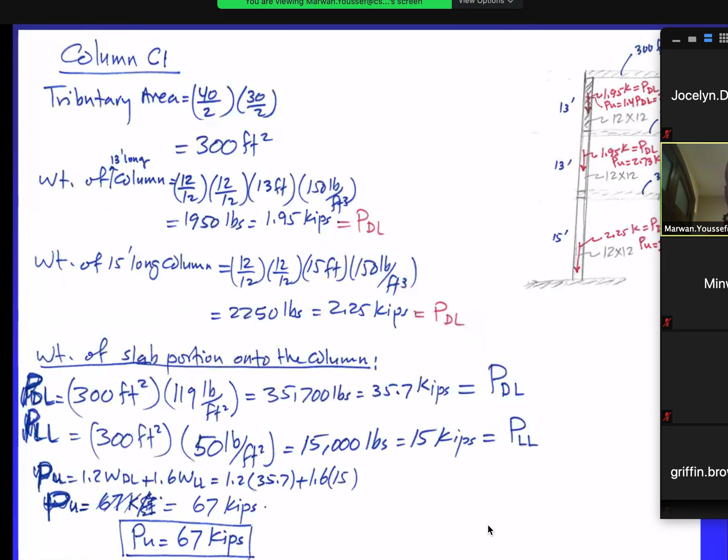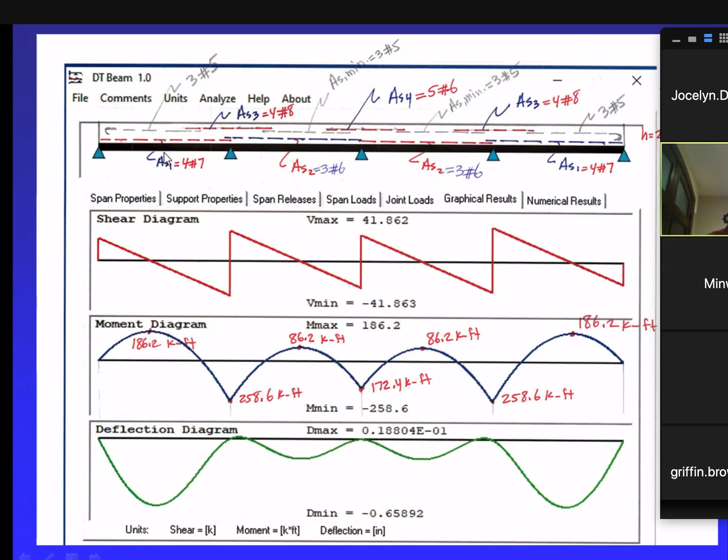Just to remind you, we took the DT beam results, and I went through how we designed the rebars based on the moment diagram. And then we showed how you show the steel and all that stuff, and then we went over this table.

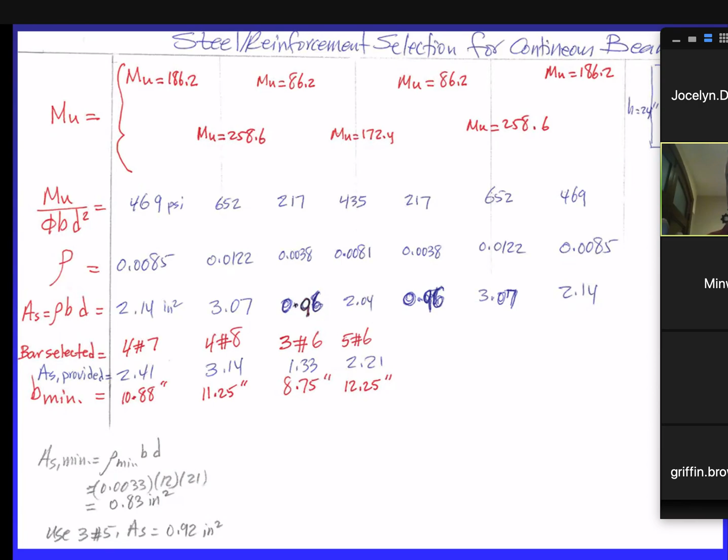So today I want to do the same, but for the slab design. By the end of the day, you will be able to go to your project and design your slab and put it aside, and you're done. So you will see the time we're going to spend today, that's the design for all the slabs on the whole building, just to kind of see the magnitude of that, and you'll see how simple it is.

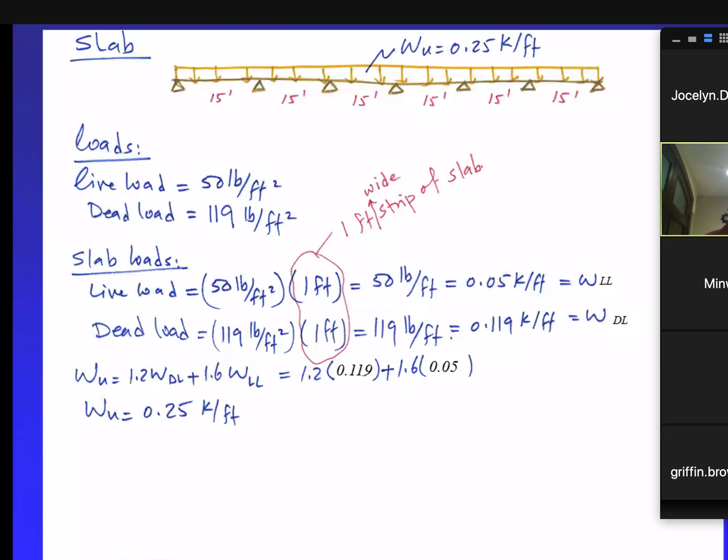Speaking of the slab, last time we talked about, just as a reminder, this was our slab. Remember? And just let me go one step further back.

When we started with our building, we said in order to make this one-way slab, we inserted this floor beam. We inserted one beam here, we called it floor beam or beam 2. We inserted another floor beam and another floor beam. So looking at the cross section, my spans for the slab is now 15, 15, 15, 15, and so forth, because I started with a 30 here and I broke it in half. So this is my slab then, 1, 2, 3, 4, 5, 6 spans.

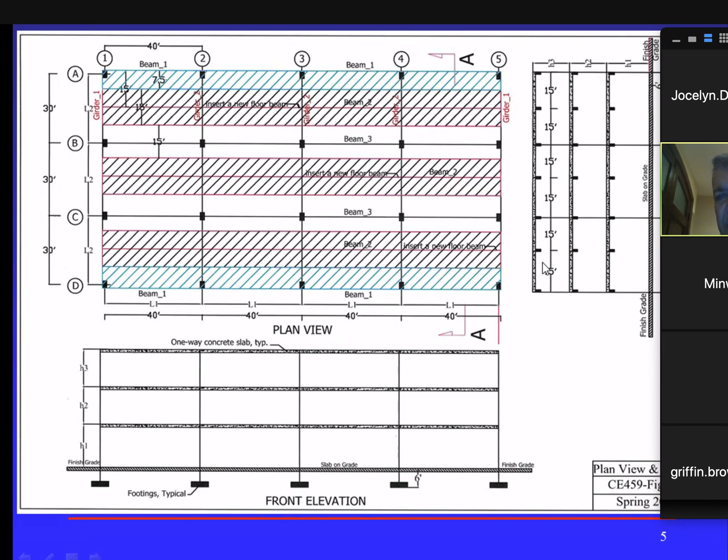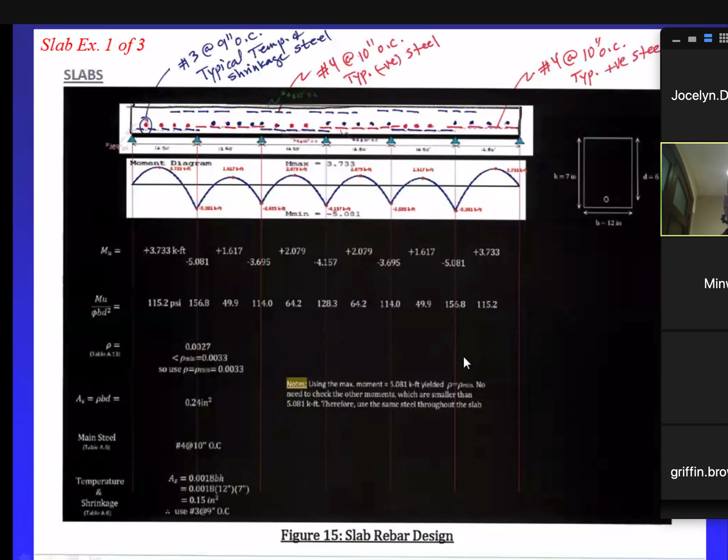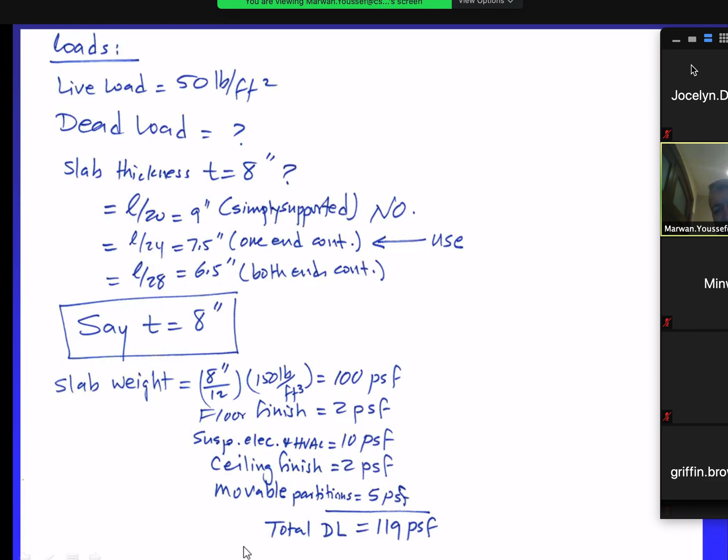Remember that? So we took that, and we of course determined the thickness of it from here, and then we went ahead and calculated the loads on it. That's not the right one, but it's the same one anyway, I'll show you. We calculated the loads. We ended up with T equal 8, the thickness from the table, and then we ended up with the total dead load of 119. Okay, so we did all that.

We talked about it many times, and then this was our slab where live load is 50, the dead load 119, and we calculated the load, so we ended up with W 0.25. So now we're gonna take this and put it in DT beam.

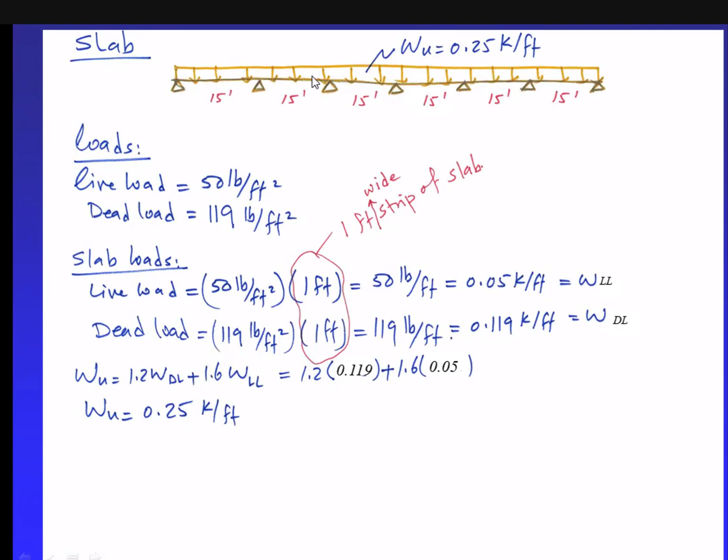Okay, so I'm gonna show you the one already made, so we don't have to waste the time. So you'll notice we have 1, 2, 3, 4, 5, 6 spans, and the load is 0.25. So you have to go to DT beam like this. Instead of 4 spans, you're gonna push insert a new span 5, insert a new span 6. The length of that is gonna be 15 in my example. Okay, so what about the area and the inertia?

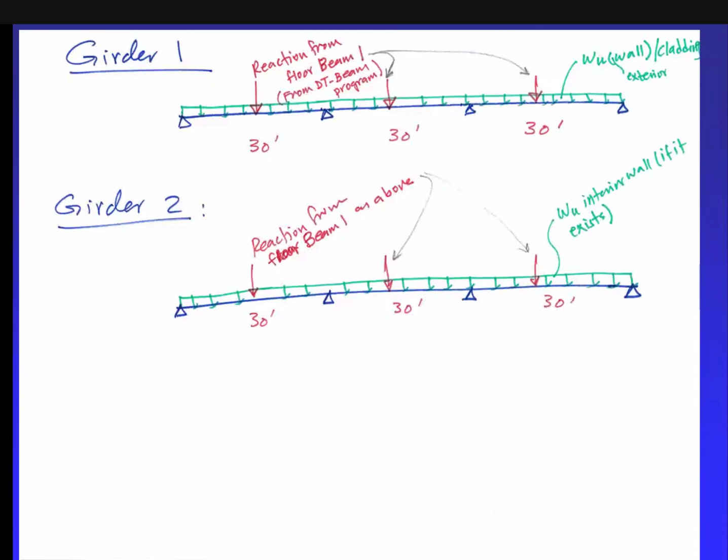Okay, so let's go, that's what we're gonna talk about next. So if I take the example I'm gonna use today, which is this one here, already solved, and I posted this on Beachboard, so you should have that.

So from the table, I determined that the total thickness is going to be 7 inches for this example. Okay, 7 inches thickness for this example. And remember how we take 1 foot strip of the slab, 12 inches, so B equal 12 inches. Okay, and then I'm going to put the bars at the bottom. So D is going to be roughly 7 minus 1 inch equals 6 inches. And then the way we do it here, D equal H minus 1, 7 minus 1 equals 6. And remember, the one is, we said that the clearance from the edge of the bar to the bottom is 3/4 of an inch, plus the radius of number 4, it's about 1 inch.

So 7 minus 1 is 6 inches. All right, so we went through that when we did the example for the slab. So this is the section I need. So if this is my section, what is the area? Area is 7 times 12, divided of course by 144 to give you the area in feet square. That's what you're gonna enter in the DT beam. How about the moment of inertia I? B H cubed over 12.

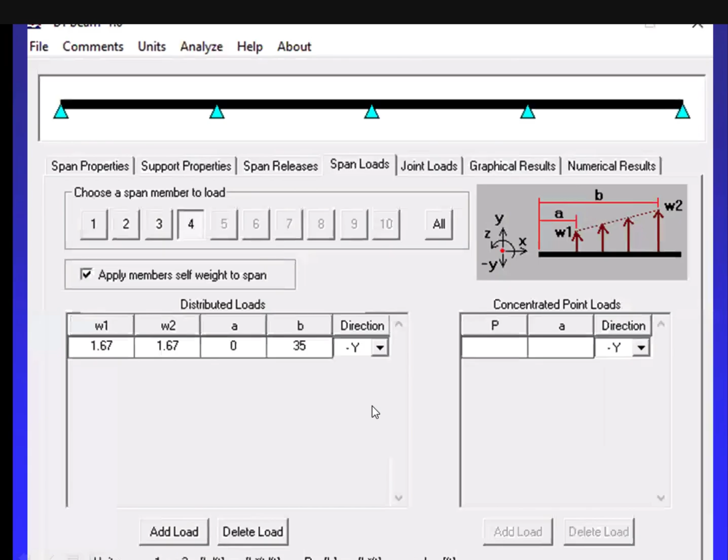Just as a quick review for you, once you get the moment diagram, it's gonna be very similar to what we did with the beams. There's a few things different in the slab, and that's why I wanted to do that today. So let's start with that.

Very similar to the beams, but notice the moments here are much smaller than the beam, right? Much smaller than the beams. Because the spans are small, and then the load is small, and then the thickness is small.

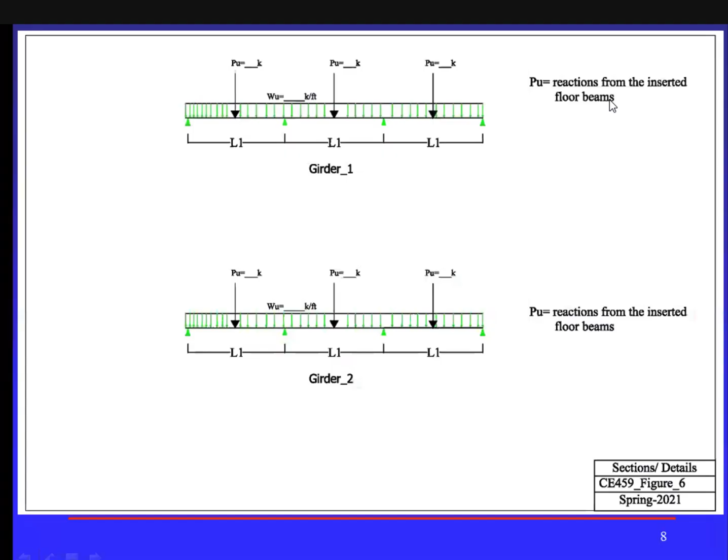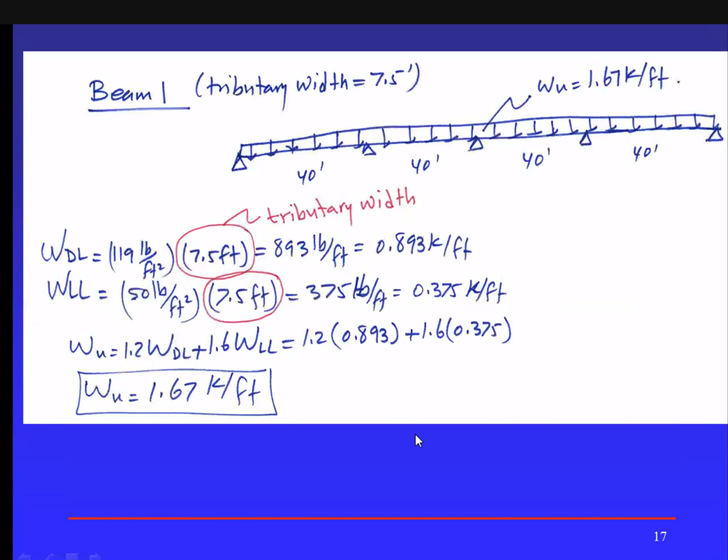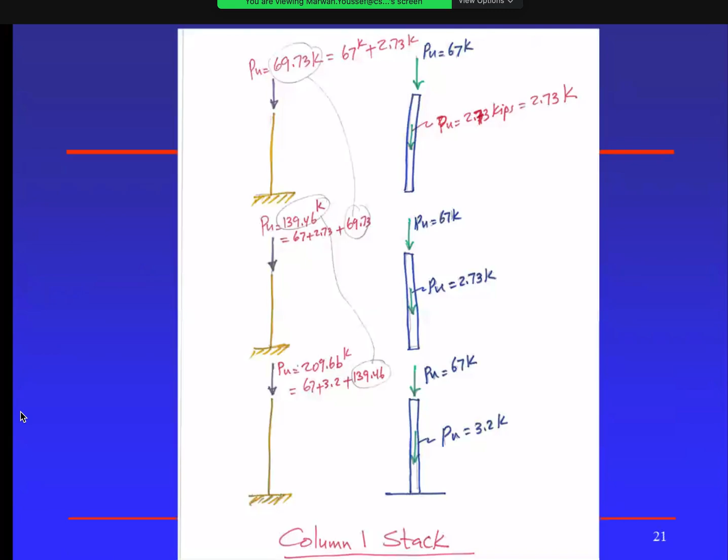Just to remind everybody, the question is, when I did my slab here, I ended up with, where is that? Let's see, right here. When I did my example, I ended up with T equal 8 inches, but that's not what I'm solving, I'm solving a different slab, sorry about that. So the example I'm doing here is a different example, which I took from a previous group from previous semesters just to show you. Look how nice a job they did, really, so you need to do good jobs like that. I added these by hand, of course, they didn't do that, I just used their sketch. So this is 7 inches because it's a different example, and even their slabs are not 15, I think this is 12.6 or 12.5, the span, sorry.

So we got that, mu over phi bd squared, we said we're going to multiply by 12,000. Once we get mu over phi bd squared for the maximum moment, it comes out to 156.8.

Once I have that, what are we going to do after that? Anybody? Once I have mu over phi bd squared, what am I going to do? Go look for rho? Exactly, thank you. We're going to go look for rho in the back of the book, and make sure it is for F prime C 4,000 and Fy 60,000. We will find that rho equals 0.0027.

This is where the important point is. Remember F prime C 4,000, Fy 60,000. If you look at rho minimum, the minimum rho allowed is going to be 0.0033. See that? So the rho we calculated is less than rho minimum. So what are we going to do? Anybody, which rho are we going to use?

Anybody, any question? Professor, their rho, 0.0027. Yes. How did they obtain it, are you looking in the book? Yeah. Okay, do you agree or no? Let me get my book, give me a minute.

Sorry, actually, no, let me open my digital book so we can all see it together here. One second please, let me switch screens. All right, give me a minute. We can do that. Oh yeah, it is correct, Professor, it is correct.

All right, that's fine, so anybody have any questions? All right, so if you look up that rho, it's going to be 0.0027, less than rho minimum. Sometimes you're not going to even find a rho value for your problem, it's not on the table. That means it's too small, so you will use rho minimum. All right, so I think that makes perfect sense.

All right, once we get rho minimum, we have that, then we need to get the area of steel. What is AS equal? Rho BD, just like the beam. Rho is 0.0033, B is 12 inches, D is 6 inches. I can get my AS equal 0.24 inches square. Any question on that?

What was our mu over phi bd squared when we picked up rho? Do you mind, what was that value? 158, right? Yes, anybody? Yes professor, it fell right in between. Yeah, mu over phi bd squared was 158 point something, because it fell right in between 0.0026 and 0.0027, and they went with 0.0027.

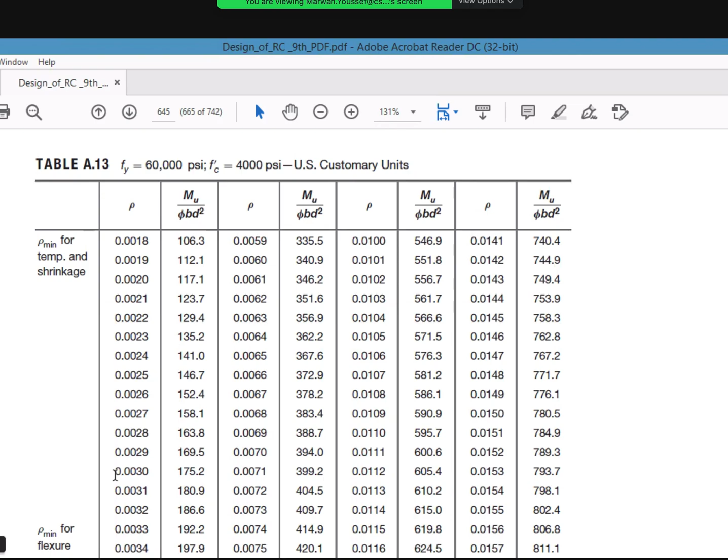Okay, so that's where we picked it up. But look where rho minimum is. Rho minimum is right here, 0.0033. So it's less than rho minimum, so we will use rho minimum. All right, that's the first thing.

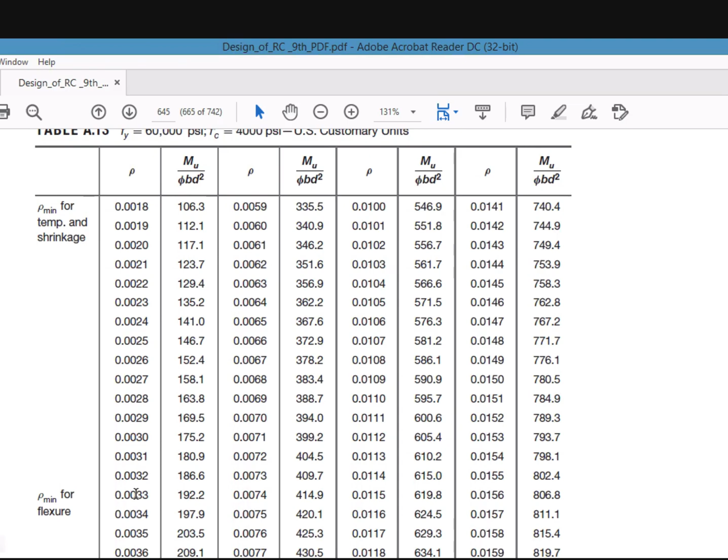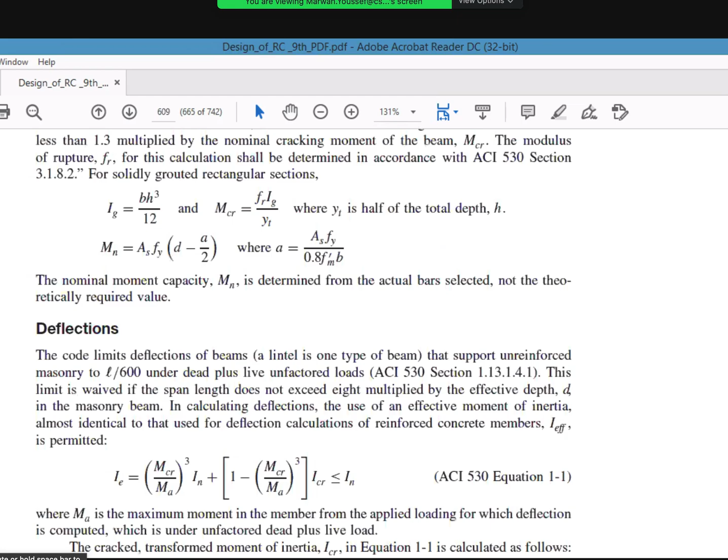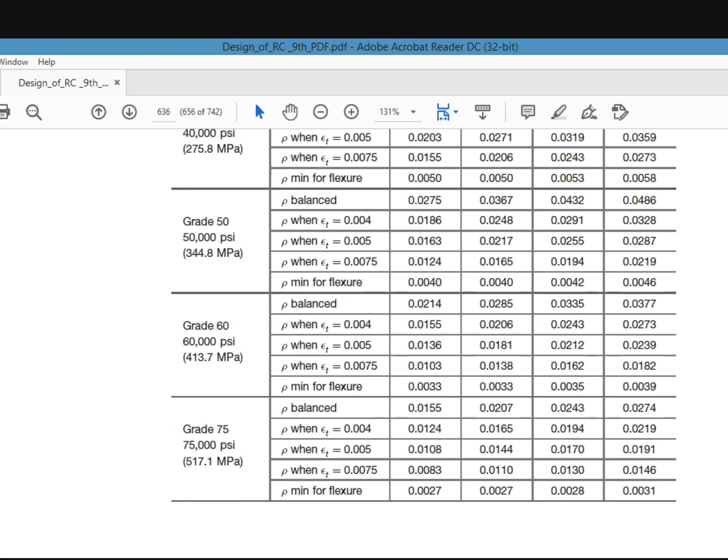Second, let's go to the table where we pick the steel for the slabs. I want to show it one time so you can do that. So again, just as a reminder, rho minimum can also be obtained right here. F prime C 4,000, Fy 60,000. You can get rho minimum 0.0033, the same.

And while we're here, somebody asked yesterday in the lab, how do I get rho maximum? Remember we said rho maximum, it's not here. You see rho minimum, you see rho balance, but you don't see rho max. We said rho max is the value of rho corresponding to epsilon t equal 0.005. So the maximum rho is 0.0181. This was a question yesterday.

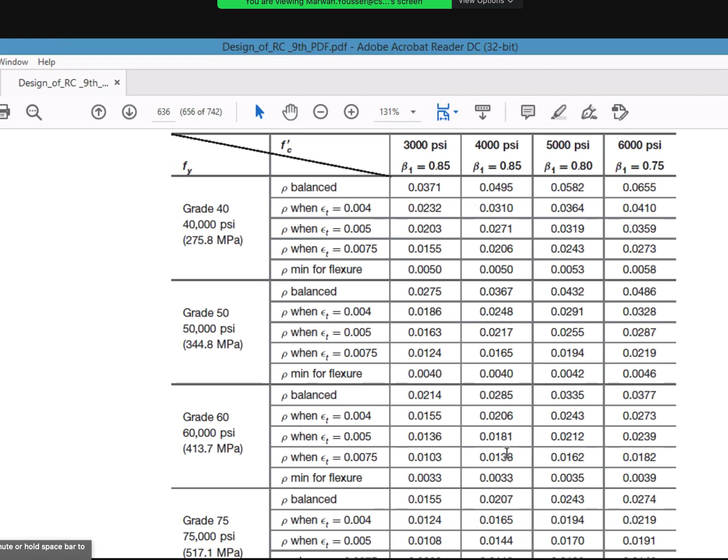Okay, so what was our area of steel? Anybody remember from the example? 0.24, is it? Should I switch back? Let me see, let me switch back. See, our area of steel was 0.24. See that? That's what we calculated. Rho BD, 0.24. Okay, so let's look at the table for 0.24.

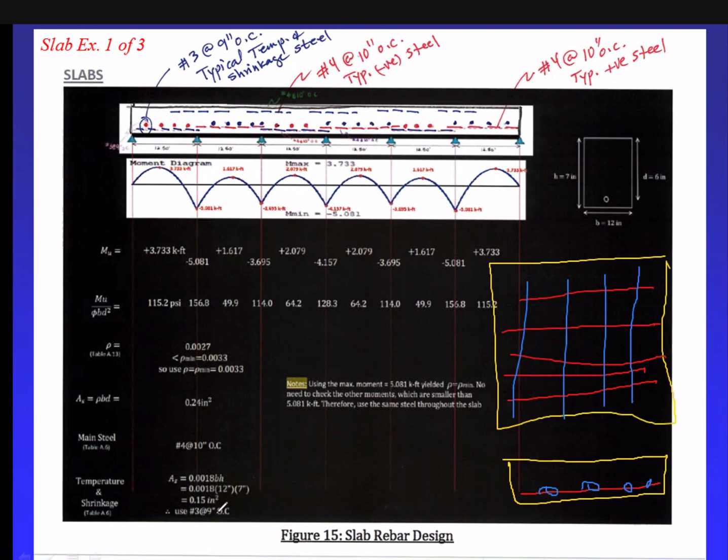So 0.15, I'm gonna look at number 3, 0.15. Look at that, it's right there. So what kind of steel do I need for this? Come on, how do I pick up the steel for 0.15? What bar number, first of all? Number 3. Number 3 at what spacing? 9 inches, exactly. Thank you.

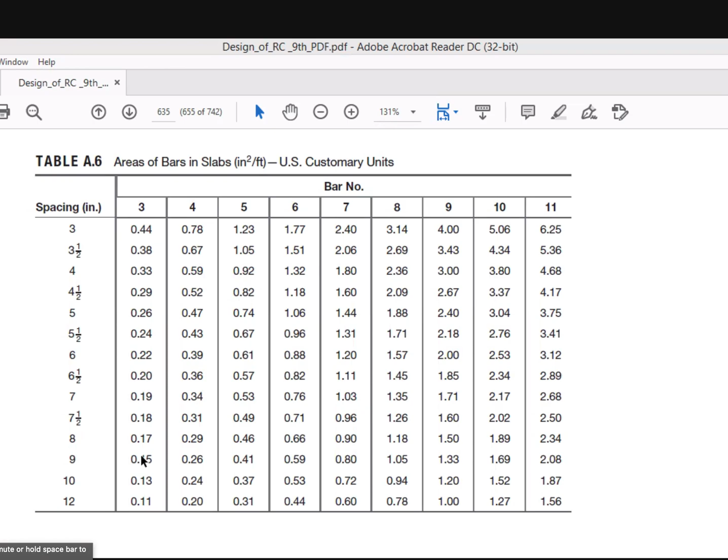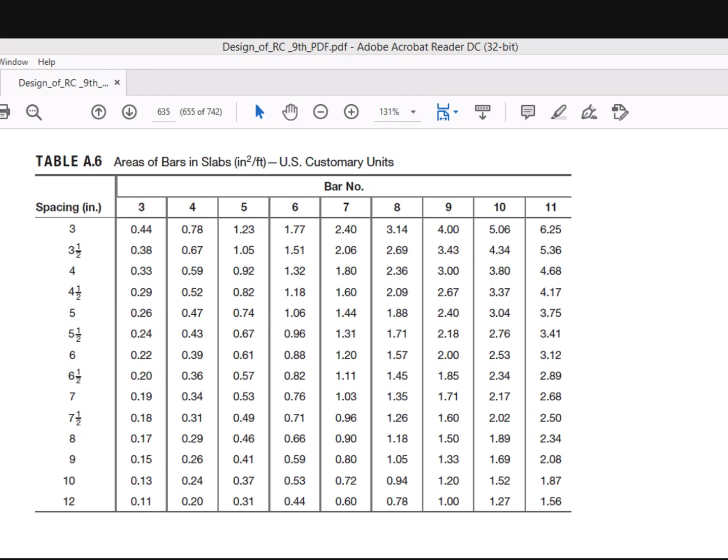So number 3 at 9 inches on center. See that? Number 3 at 9 inches on centers. Okay, that's where this comes from. So that's why here you see number 3 at 9 inches on centers. So, and that's where this bar goes.

These are the perpendicular ones. And look at this, number 3 at 9 inches on centers, typical temperature and shrinkage steel. When I say typical, that means all of them are the same. You will see the word typical on construction plans in the field. They tell you typical, that means it's all the same like this. Instead of writing it for every line, they just write typical, so you know it applies to all of them.

Okay, any question? So look at this. We just designed this slab. And this slab is gonna be used on the first floor, on the second floor, and on the third floor. No difference. So you're done with your slab design. Okay, this is what kind of steel you need and what thickness you need.

One more thing we need to talk about is this negative steel, how we're gonna make it float like this. Okay, then what we do in real life, we use what we call chairs. We use steel chairs. Let me show them here. Let me do it in yellow. So we use chairs like this on both ends, and the bar sits on top of it, okay? To make sure we leave enough room for cover at the top.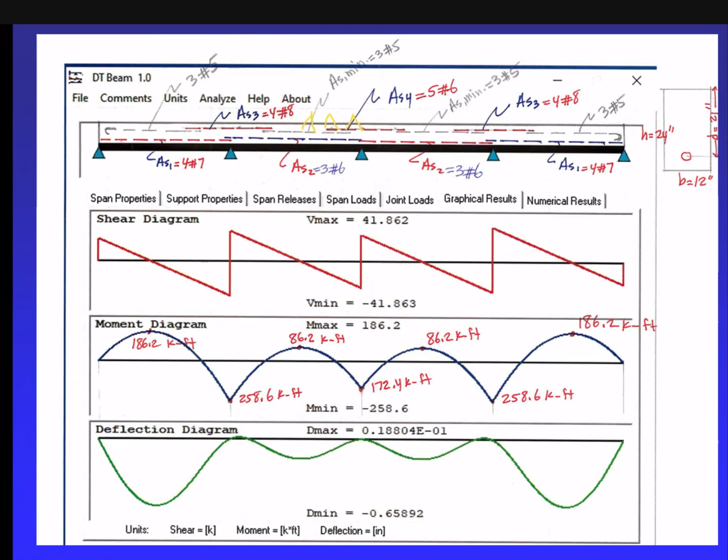In slabs, we don't have to do that. We don't have to fill these gaps, okay? Because you know, you're talking about a beam, and a beam is limited width, but the slab is the whole width. So we don't do that in the slabs.

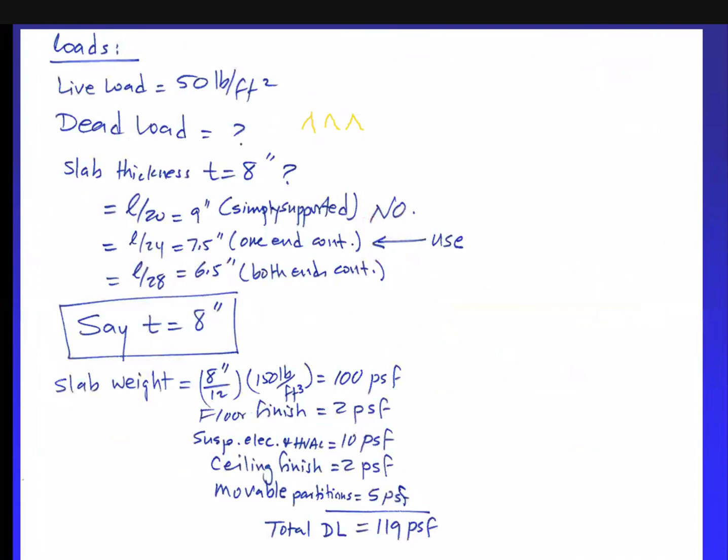So when you draw it to scale, you're gonna see that you have a lot of room here. So you just leave it blank. It doesn't matter because the thickness is not that big, and then the chairs will hold that in place. All right, so that's what we do. Any questions on that?

So now with this, you should go back and please do that before next week, next class. Make sure you go and design your slabs. It's very easy, see, I gave you everything you need. You're going to have different numbers. Design them, put it in your 3-ring binder, and you're done.

You don't have to go back like in the beams. We said you have to go back for the stirrups, shear reinforcement, because slabs do not have shear reinforcement. If you remember, we'll see it in chapter 8. Certain structural members do not need shear reinforcement. One of them is the slabs. One of them is the footings. They don't need shear reinforcement, okay?

So if you do this, you're done. You're done with the slab, put it aside, and that's it. All right, any questions, guys? Any questions? All right, so now

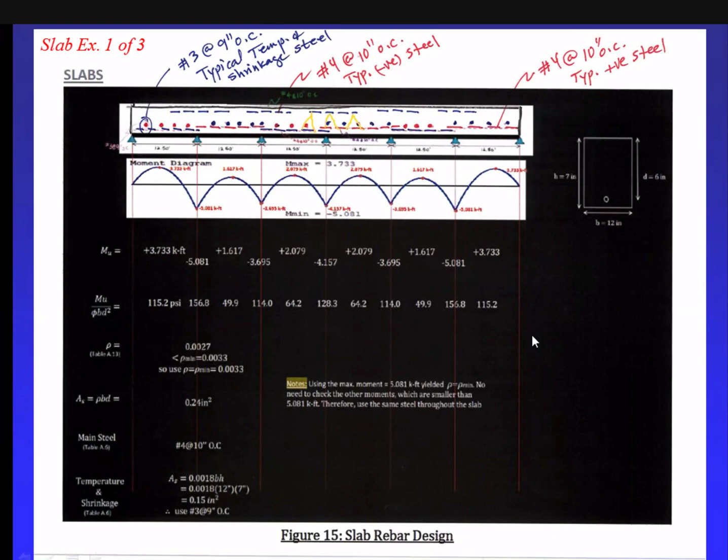Let's go back to the project. So now what have we done? We did the beam designs. You should be done with all that now, with the exception of the stirrups. We just did the slab design.

Okay, and then next we're gonna go to column design. So what I'm gonna do after we finish chapter 5, which is next week, we will do that. We're not gonna need the whole class, maybe half the class we finish chapter 5. The other half I'm gonna skip to chapter 9, and we'll come back to 6, 7, and 8. I'm gonna go to chapter 9 so I can show you how to design the columns. Very simple. We'll design the columns, and then the next lab we will design the column for your project.

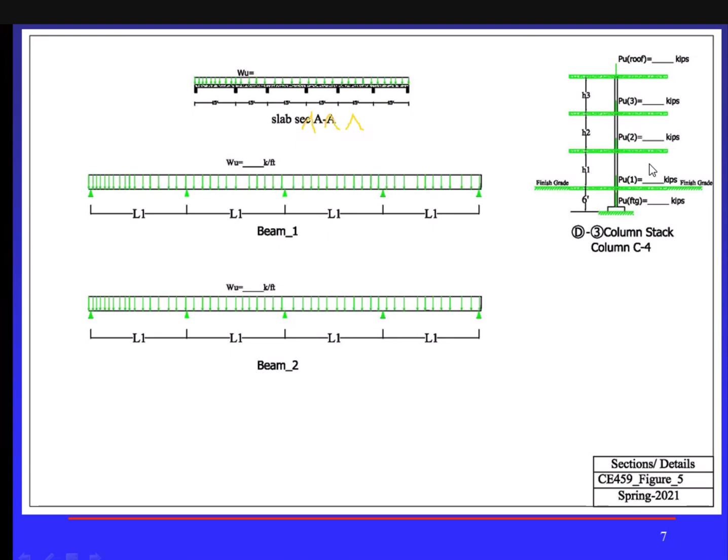And then after that, then you're done, right? Because remember the columns, according to this, we only have 4 columns that we have to design, 4 stacks. So you can do them after next week. And remember, we said 4 stack of columns like that. So we will do that next week, and you can design those and put them aside. You're done with the columns. So the only thing you're gonna come back to is the shear stirrups, which is not really a big deal

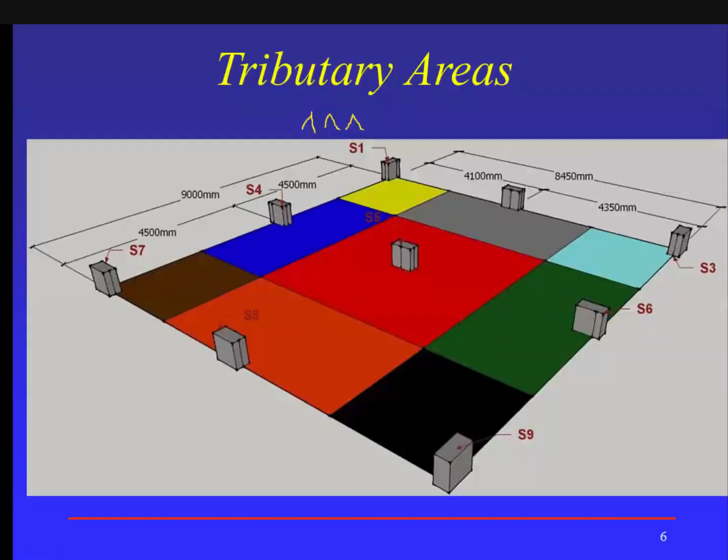for the beams. With that, then we're done designing the building for gravity loads. Okay, that means for gravity load, dead load, live load, our design is done. Oh, I'm sorry, with the exception of the footings. We have to design the footing later on after we get that.

Then, of course, we live in seismic areas, earthquake areas. I'm gonna show you how to do the seismic design for the building, and we have to design the shear walls for this. So we're gonna put a shear wall in this direction, shear wall here, shear wall there, and shear wall there. So we will do those also. We have plenty of time, so we can do that. Okay, so that's where we're going with that.

Now, as far as the midterm, I understand we have next week and then the week after, before we take spring break, right? You guys agree with that? So we still have 2 classes before spring break. And I will confirm that, that's what somebody told me last night, but I will confirm it. If that's the case, we will have finished chapter 5 next week, and then the week after we'll do our midterm. This way you finish it before you go on spring break. Okay, and that will be from chapter 1 to chapter 5.

And then when we come back from spring break, then we'll start the seismic design in the lab, and we will continue chapter 6, 7, and 8 and all that stuff in the class. All right, so that's where we're going. Any questions?

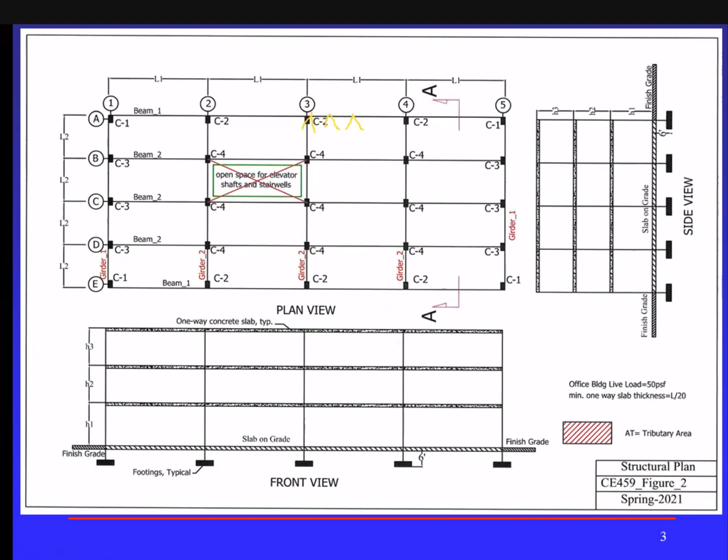All right, any question? Professor? Yes, so for assignment 2, the data for lab, for group 4 is missing. Yeah, you told me that. Okay, thank you for reminding me. Let's check that, 1 second please.

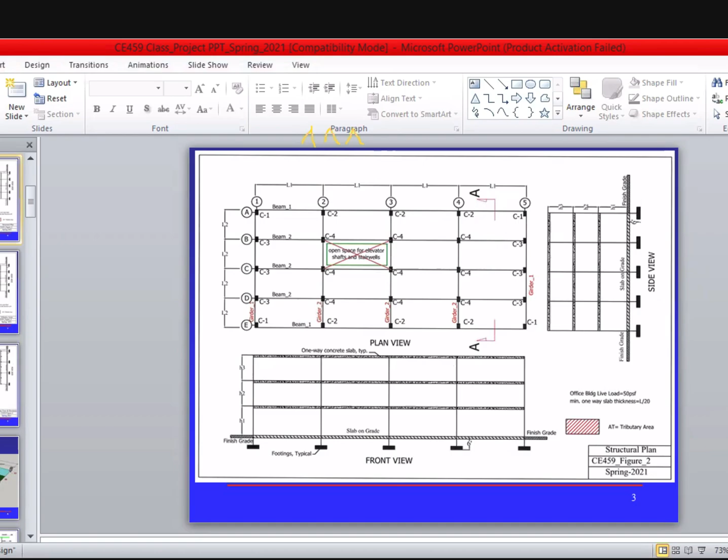Yes. Okay, so what about, did you get the value for F prime C and the data for the beam test? Yes, we did. So all you need then is to, let me click on that. I'll share screens with you in a second. So you're saying you don't have this, huh?

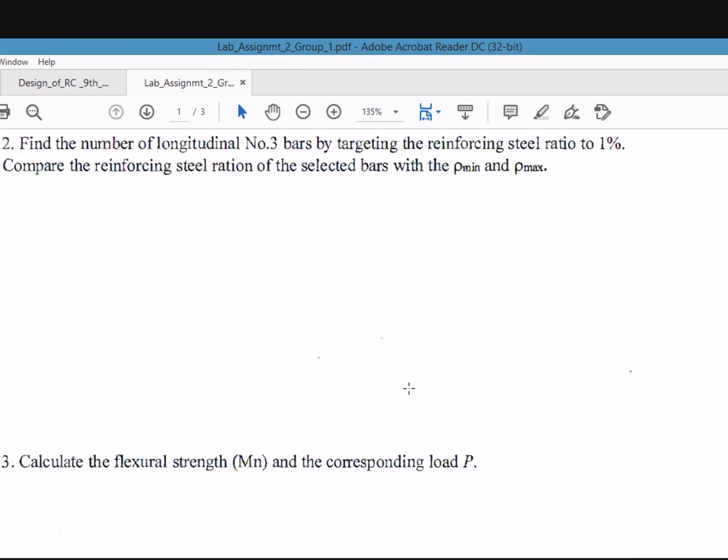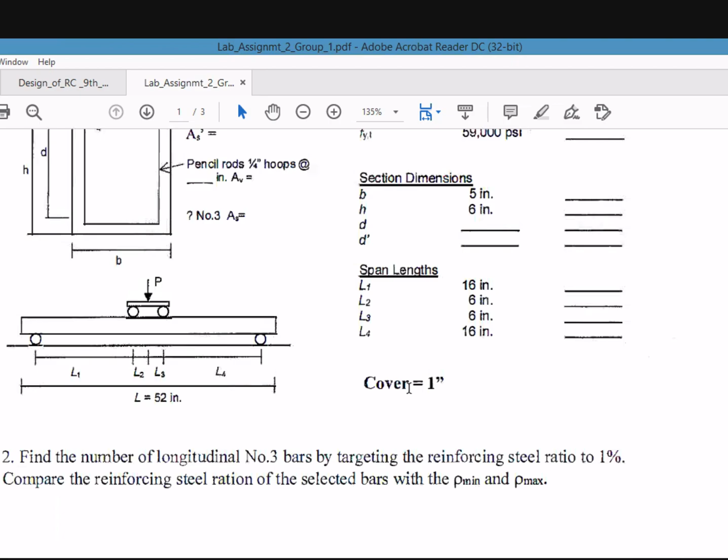Exactly, yes. You have assignment number 2, group 1, group 2, group 3. So what you can do, my friend, is use the same as group number 1. Let me double check something here. Yeah, go ahead and use number 1. So 1, 2, 3, and then number 4 will use number 1 again. Okay, thank you. All right, you're welcome. Any other questions?

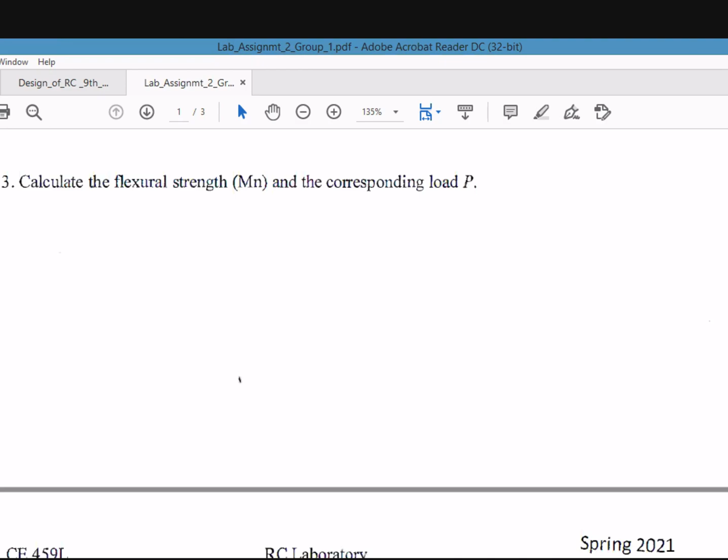Yeah, since we're in this lab already, I'm confused on what to put on number 6. Number 6? Yeah, on this lab. On this form here? Mm-hmm. Okay, so number 3, number 4, number 5, number 6. This one? Yes. Okay, let's see.

For this beam, define the steel specification by filling the table. Let's see. L1, for the previously designed beam, define the steel specification by filling in bar size, quantity, bent bars, standard seismic hoops. You see this L1 and L2? Keep that in mind for a second.

And we have straight bars. We don't have bent bars, so forget the bent bars. So we have straight bars and we have these seismic hoops. They're really, we don't call them hoops, we call them stirrups. So we need this one and the bottom one. So let's go and explain that: L1 and L2.

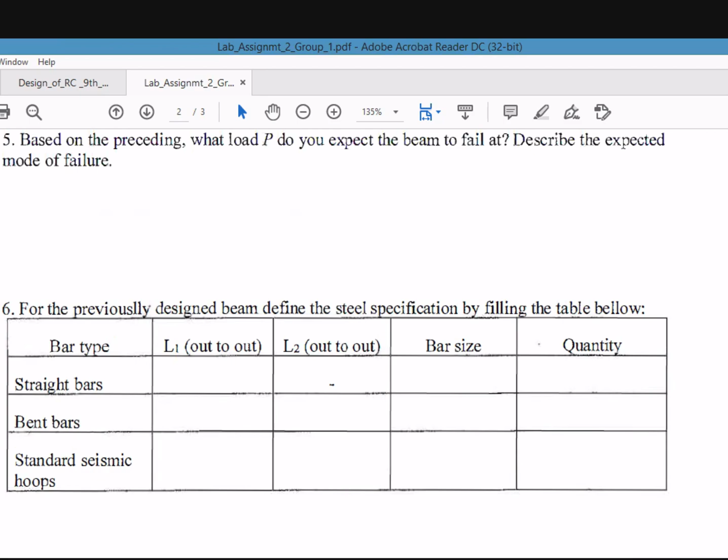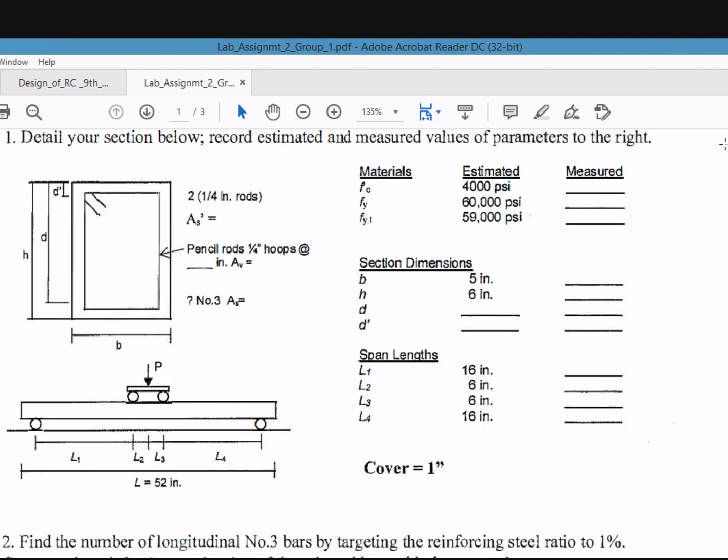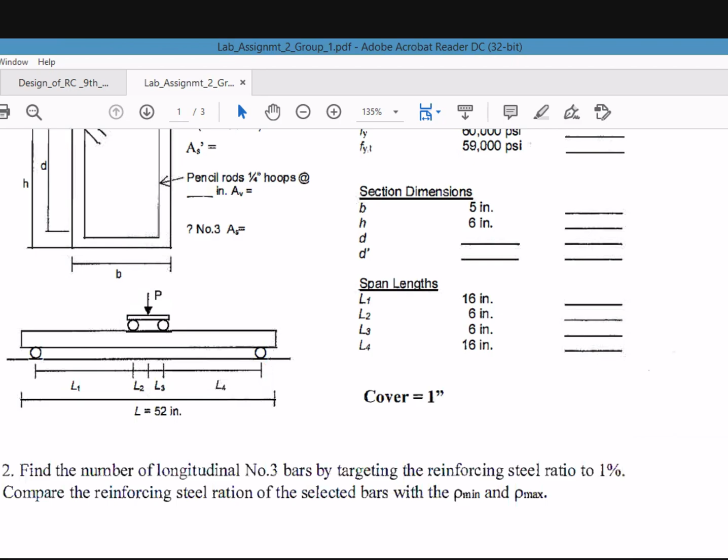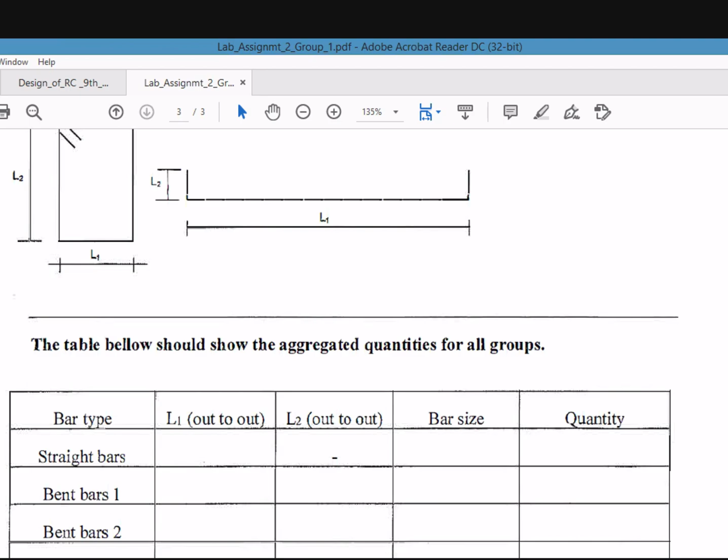There you go. So for the hoops, there was another graph here. Just bear with me. There was another sketch here, L1 and L2. Okay, here it is. So if you keep going down, right, there it is. For the hoops, there's L1 and there's L2.

Okay, now our beam is 5 inches wide, right? So remember, this is gonna go inside of the box, and you need some concrete on this side and that side. So if this is 5 inches wide, let's say you want 1 inch from this side, 1 inch from that side. So 5 minus 2, so L1 is gonna be 3 inches. Does that make sense? Yes. Okay, for the L2, for the hoops, the beam is 6 inches deep. So again, we need 1 inch at the bottom, 1 inch at the top. So 6 minus 2 is 4. So L2 is 4 inches. That's for the hoops. Is that clear?

Yes, thank you. Now we go to the straight bar. This is the straight bar. See, the straight bar, we usually bend them like this, and I'll show you the picture in a second. So this is how we bend them. This is gonna go into the beam that is 52 inches long. So if 52 inches long, we need 1 inch on this side, 1 inch on that side.

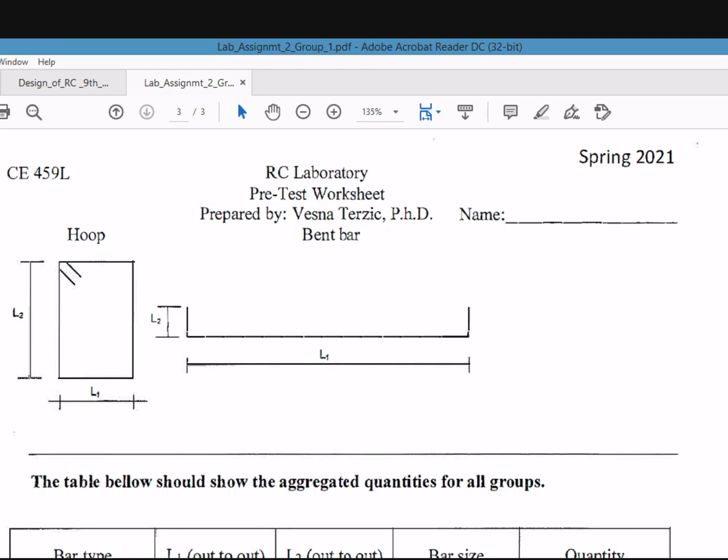So then L1 is gonna be what? Anybody? 50. 50, thank you. So L1 is gonna be 50, because 51, 52. And then L2 is gonna be what? Again, the beam is 6 inches deep. So what is L2 gonna be? Would be 4. 4, thank you. 4 inches. That's it, that's what goes in that table. Does that make sense? Yes.

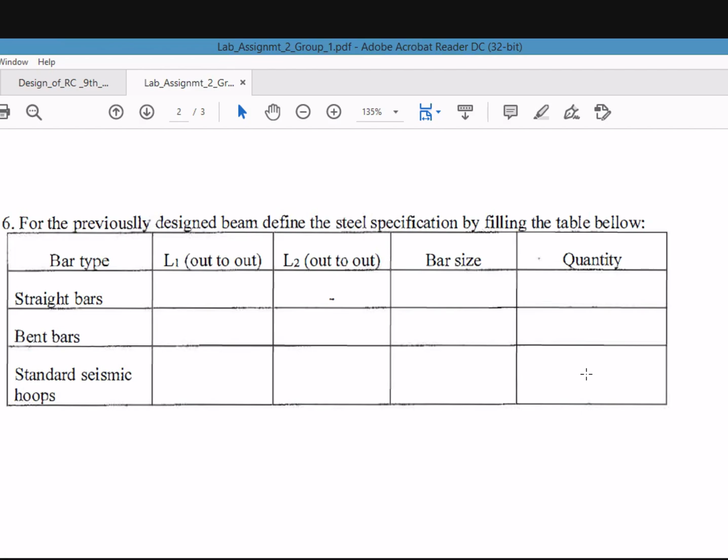Okay, very good. So right here, here you go, L1 and L2 in here. The bar size, it'll be like number 3, whatever bar size you use. The quantity, how many, 3 or whatever in your beam. And then here the standard seismic L1, L2. The bar size is gonna be pencil bar or whatever it is, 1/4 of an inch. And then the quantity, we already, I think, talked about that. It's gonna be, the spacing will be 2.5 inches on centers. They're gonna be about 20 of them, because the spacing is gonna be 2.5 inches on centers. And that's it. Any other questions?

Joycelyn? You're here, I heard you. Joyce? That's cute. Joycelyn? Yes, I'm here. Angel? Professor. Yeah, I recognize your voice. Okay, thank you. Arba? Here. Okay, thank you. Binyam? Over there, you. Binyam?

Adis? Here. Thank you. Gabriel? Here. Thank you. Raymond? Here. Thank you. Christian? Sean? Here. Thank you. Craig? Here. Thank you. Minwoo? Here. Thank you. Biri? Prado? Here. Thank you. Myra? Here. Thank you. Armando? Here. Thank you.

Alexis? Basilio? I'm here. You are? Okay. And let me see, Binyam, are you there? Binyam is missing. Okay, so who are you that's going to be missing next week? Sean Lowe? Yes. Okay, I see that. All right, very good, no problem.